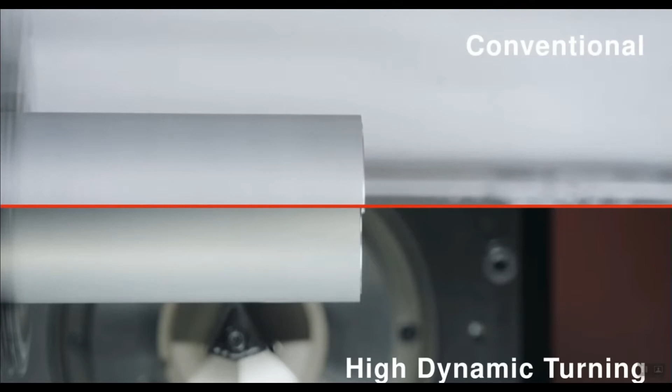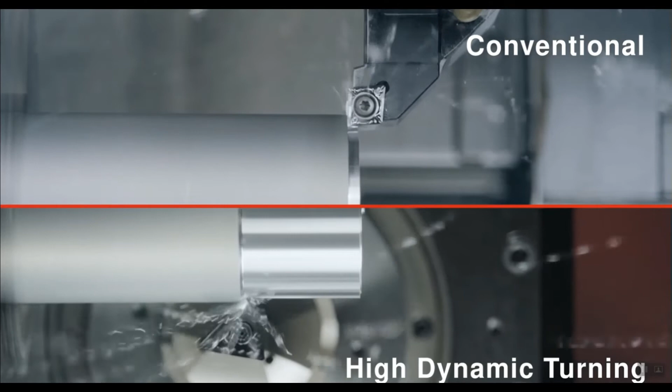At the top, we're going to be seeing the conventional turning with the traditional tools. On the bottom, we have our high dynamic turning or FreeTurn, and you can see that it's like a triangular rod, and you can actually use all three of those sides of the triangle to cut. So if you need a new tool, it just rotates your spindle, indexes to that, and now you have a new tool. So that's saving you a lot of tool change time.

In addition, you can have maybe those two short ends as your roughing tools. You can see how deep of cuts it's taking, and then once you're all finished, have it indexed to the sharper point, and that allows you to do a better finish. And you can see here also that it's going back and forth, which is really a huge advantage. And you can see through this video how much faster we're able to machine this, almost exclusively because of that functionality.

With high dynamic turning, you can also run at feed rates about 40% faster, and you can also take a lot deeper cuts. That's because we're not using these really thin tools to get into, as you can see in the top, some of these nooks and crannies. Because it indexes and because it rotates, it can get into those nooks and crannies without having a really thin insert, which allows us to take deeper cuts.

And you can see that midsection there, that was all done in one contour cut, and that's what we're going to be doing in our demonstration today as well. Kind of impressive cuts here. Again, you can see our finishing here on the bottom. And as I alluded to before, this video cut the conventional tool changes out, but they are doing tool changes, whereas the high dynamic turning is not. So it's even machining this part faster than we're seeing.

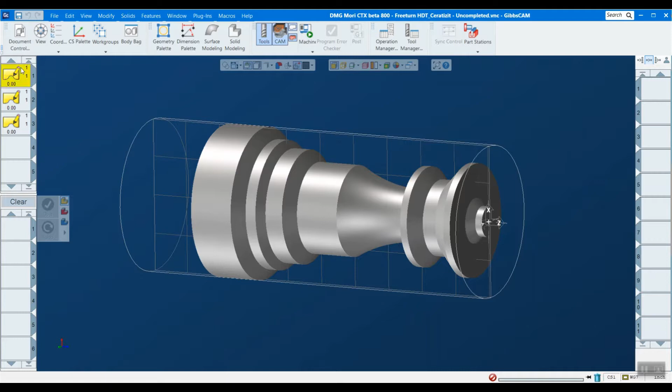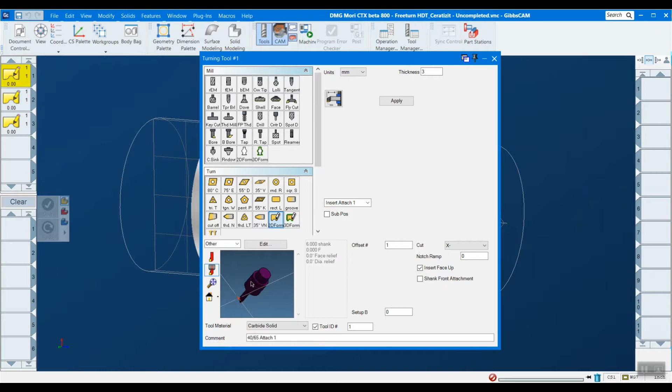So how do we do this in GibbsCAM? The first and most important thing I would say is the tooling here. Everything we're going to be using today is actually a form tool. We went out to Ceratizit's website, and we downloaded all the dimensions for all their different tool tips and that kind of thing. And then in addition, I got their tool holders. You just download a solid model of them, and you can import that into GibbsCAM and set it all up through the intermediate tooling here, right?

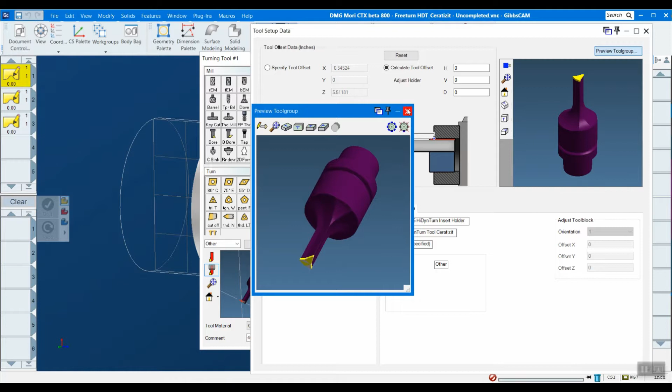And we're going to be talking about that in a different portion of the class, not in this particular video, just because it's its own separate topic. So if you'd like to know more about that, feel free to tune into that video, but I'm not going to be showing too much of that in this, okay? So that's what the tools look like in GibbsCAM. Again, they are form tools here. So let's start creating our own, okay?

So I'm going to go to a home view here, which is just the same as the top view, and I've set up some work groups here with a bunch of different stuff on them. But what I really want here is, again, those DXF dimensions that I got from Ceratizit's website. So this is what the tool looks like.

And if you're familiar with 2D form tools, you know that the tip that's touching the origin is going to be the one that we're using. So this is going to be kind of that finishing tool that we talked about in our orientation here, right? So all I have to do is double click this to select, and let's create a new tool. We want it to be a 2D form tool. I'm going to hit apply here, and you see we have our tool pop up here.

I have a thickness of 3. Now, one thing I didn't point out is Ceratizit does all their tooling, as far as I could find, their free turn tooling in metric. Okay, so that's why I have millimeters here. So this is a 3 millimeter thick tool as of right now. It doesn't matter too much because we're going to be adding that holder on, like I said before, but just keep in mind that it is millimeters and this is an inch part, and so GibbsCam does all that kind of translation stuff behind the scenes, and you don't really have to worry about it, okay?

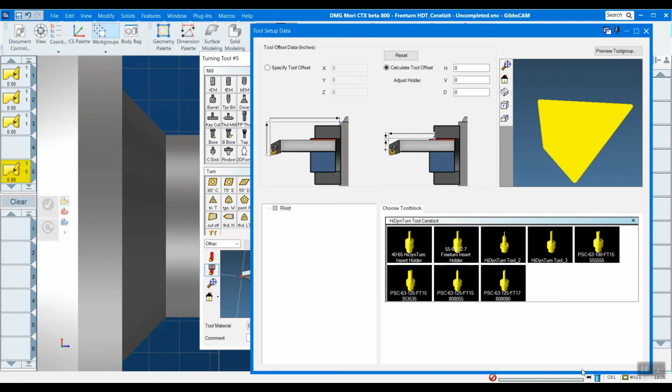So let's add our tooling now. I'm going to use the 55 degree, 80 degree, so these fat sides here are 55 degree tools, whereas this is an 80 degree, kind of more for finishing, in my opinion, but you can use it however you like. So all I have to do is select that one, and it kind of populates it in.

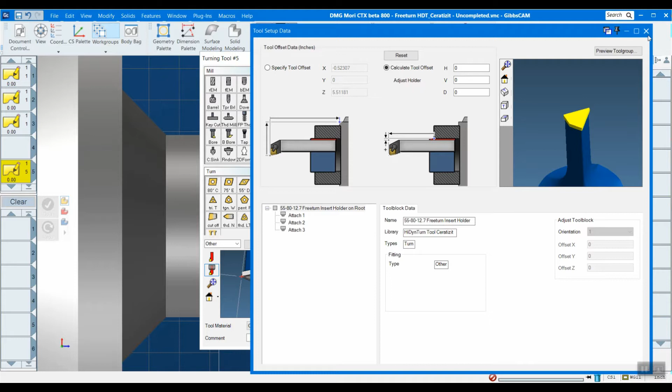And you can see here from this little tree in the bottom left-hand corner that there are 3 attachment points. And what that is denoting is we are actually going to be having 3 tools on this one tool holder, right, on this insert holder. So all I have to do is click that, and then I can go close it. And over here in our preview down here, you should see that it looks pretty good to me. Yeah, looks good to me.

One thing that's kind of nice to do, and that I recommend doing, is checking this little box down here that says tool ID number and putting in a tool, because even though they're separate tools in GibbsCam, we're going to be having a tool 5, 6, and 7. It's all technically kind of the same tool, right? So how does that happen? Well, we're going to have a tool 5 here, but then we want this tool ID to be 5 for all 3 of these, so that the programmer or whoever else is setting up the machine knows, hey, there's actually not 5, 6, and 7 tools, there's just a 5.

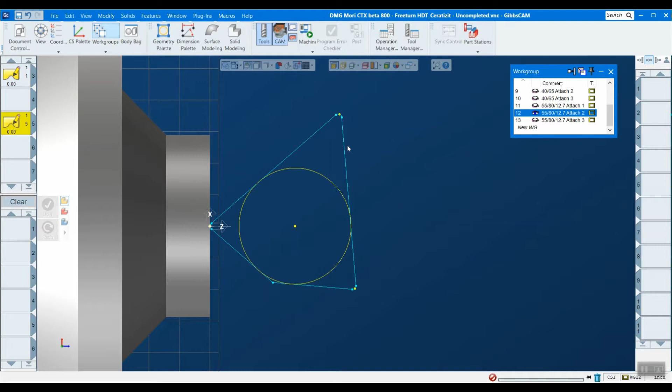All right, so we've got to continue the same strategy for the other corners of the tool. Now, all I did here is I took this and I created a new work group, and then I rotated it and translated it so that the corner that I want is touching the origin. That's just kind of basic form tool stuff. So I'm going to double click that, and we're going to do the exact same thing, 2D form tool. We're going to hit apply, and you see that the point that it's calculating with is on this corner now.

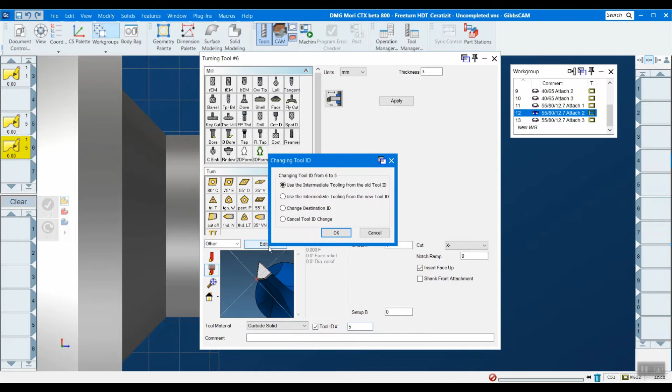We're going to add that same insert, and you can see that this kind of looks funky, right? It's not quite aligned to how we're going to use it. So you have to select the correct attachment point. In this case, it's going to be attachment point 2. If you're unsure, just look at the graphics area and choose the attachment point that kind of aligns, right? So this is attachment point 2. And again, I want to change that tool ID number back to 5 so that people know that it is the same tool. Okay, and we got one more attachment point here.

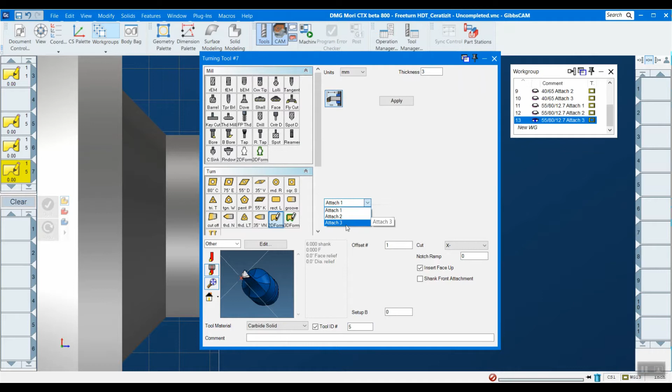All right. Once you know what you're doing, it really doesn't take long to set up at all. Okay. Cool. So that's all there is to it. I have my tools all set up here, right? And we're ready to actually start machining this bad boy.

I'm going to turn off my geometry for just a minute. I typically like to use a profiler, although you will see throughout this exercise that there are indeed cases where the profiler will not cut it, so to speak. Okay, so let's turn on our profiler here. This just grabs our outside shape, and I'm going to start by using this tool 6 here. I believe it is one of the side ones here.

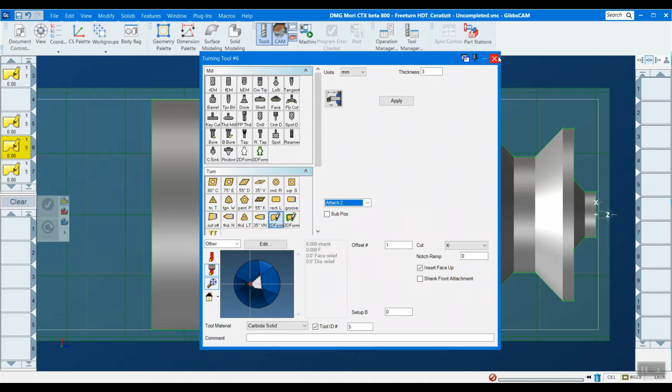Yeah, so this is going to be my roughing corner. I'm going to bring this down. If you're familiar with turning, as far as roughing operations, it's exactly the same. There's really no difference at all. GibbsCAM is intelligent, and it looks at your tooling and your holders and all that, and it knows that we're going to be doing free turn, right?

Okay, so I want to do a front face here, and I'm only going to really come off the edge like 0.1 to kind of clean up some of this facing allowance that we left on here earlier. And I'll also go ahead and leave like 0.005 stock, and that's because this is a roughing operation, right?

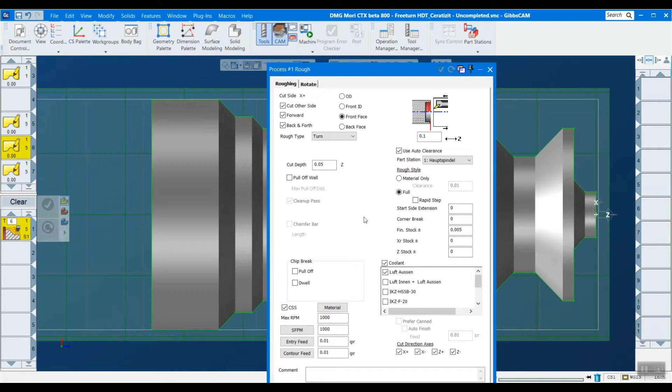I want to be cutting on the positive X side, and the reason for that is it looks nicer, and we'll be able to see it when we actually simulate it. You don't have to do that. That's just how I want to set this up. So again, really nothing else I need to dwell on here.

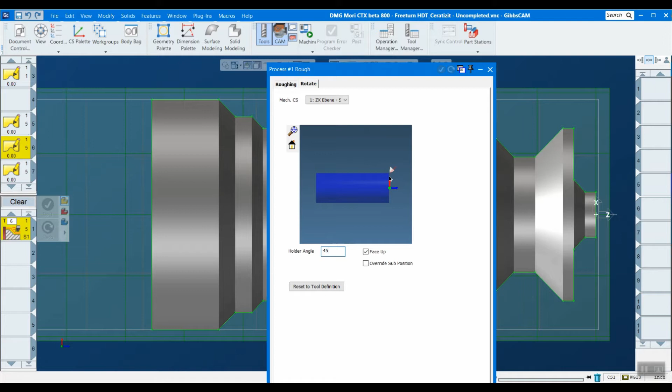Another important thing, though, is the rotate tab here. So because we have a tool that can rotate dynamically, we want to kind of angle it. And this can be an iterative process. I just know from past experience that I really want to look at like a 45-degree angle, and that's because we're cutting with this side of the tool, so I want to rotate it and have it lock in that position at 45 degrees, okay? But that's the only new thing.

The rest is history. I'm going to do a little more than a facing operation here, but I'm still just taking out the front face here. Okay, I'm going to hit do it, and you notice when I hit do it that the toolpath appeared and then it flipped down to the ZX plane, right? And that's because, again, it knows that our spindle's coming down here.

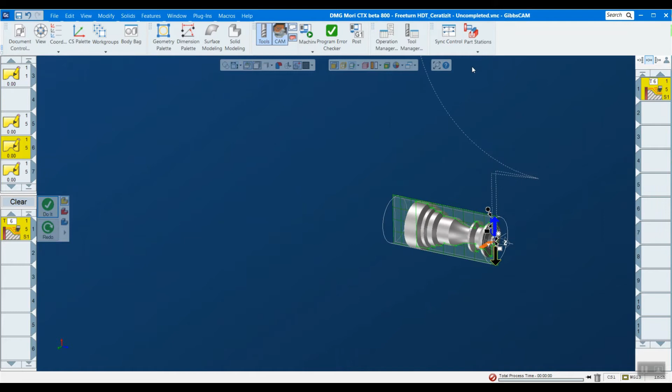My approach is a little messed up, but I'm not going to dwell on that. That's not what we're here to learn. You guys know how to fix that. It knew to automatically flip it to this plane because of our tool orientation.

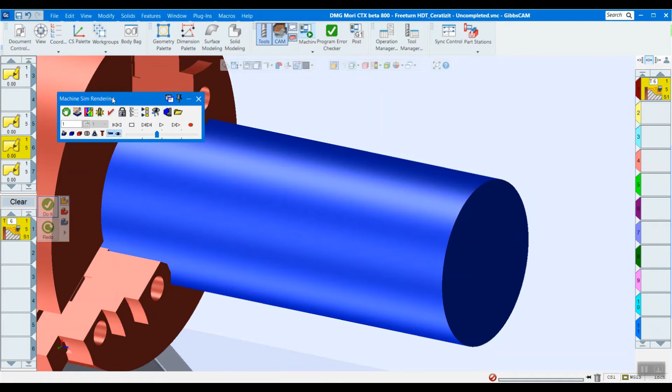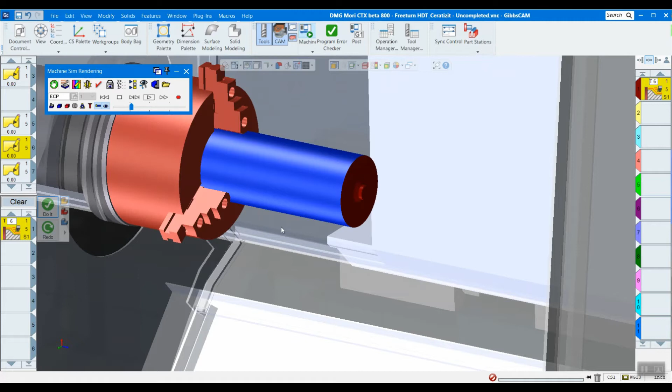Okay, so if I jump into my machine sim here, I have a DMG Mori CTX Beta 800 loaded up. And let's kind of slow this down and show you how it works here. So again, we locked the spindle in this operation. We're not rotating at all. This is not necessarily where the magic happens. So I won't dwell on that too much. We're ready for our next operation.

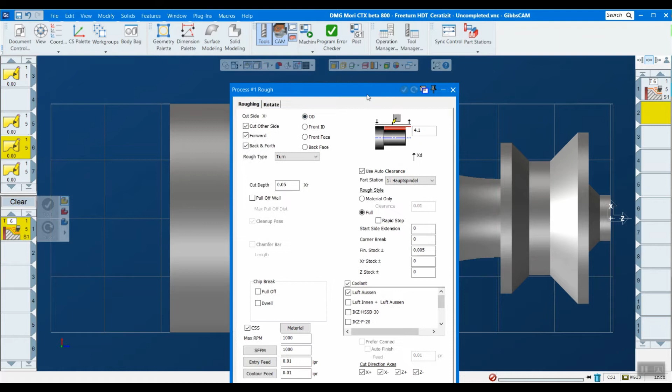I'm going to turn off my profiler. We won't be needing it. I extracted some geometry and manipulated it a little bit to kind of get what I wanted for these subsequent operations. Okay, so now let's do the same thing. I want to use the same tool, and again, I'm going to be doing a roughing operation. Now this time it's actually on the OD, right? I'm not doing the front anymore.

And I want to make sure that I'm cutting the positive X side just so that we can see it when I simulate it. You can do whatever you want when you're actually machining this. Again, I'm going to leave 5 thousandths finished stock just so we have something to take off in a later operation. But that's it. That's really all there is to it.

Now, I played with this one, and I know that an 85 degree is a good angle, and you can see that dynamically update when I populate this box here, right?

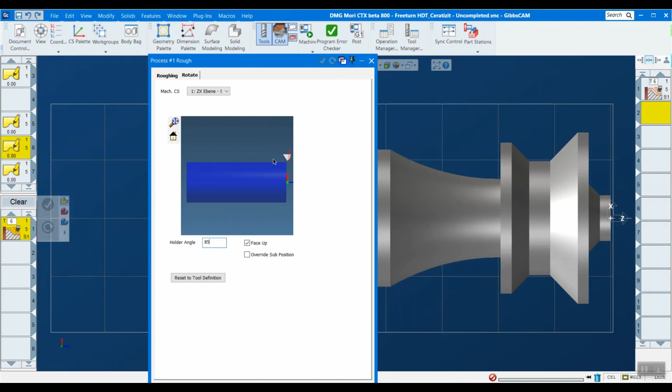And so in this one, the reason that I extracted geometry and made my own geometry is I don't want to cut this part just yet. So I just kind of want to rough all this out in a somewhat traditional manner, and I don't want to bother trying to get in here. So that's that.

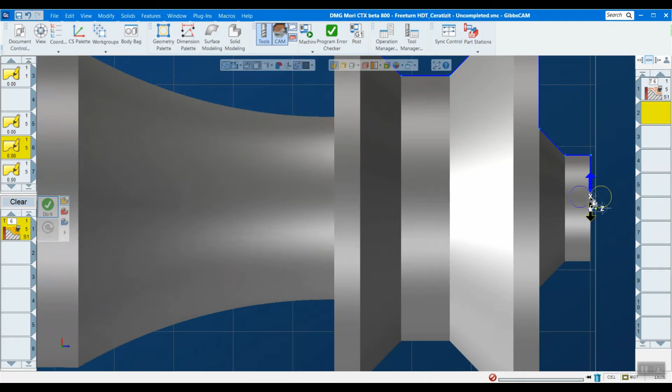I'm also not going to try and cut back here because that's where we're grabbing, right? So I want to end right here, I think is probably pretty good. Make sure that we're starting past our 0. Although we did finish or face that already, so it's not too big of a deal.

We want to make sure that we select the correct circle so that we know what side of the line we're cutting on. You have to do that whenever there's geometry. The profiler last time was intelligent and it can tell which side the solid is, but geometry is a little different. So that's all there is to that. Again, we see the toolpath kind of generate up here and flip right down.

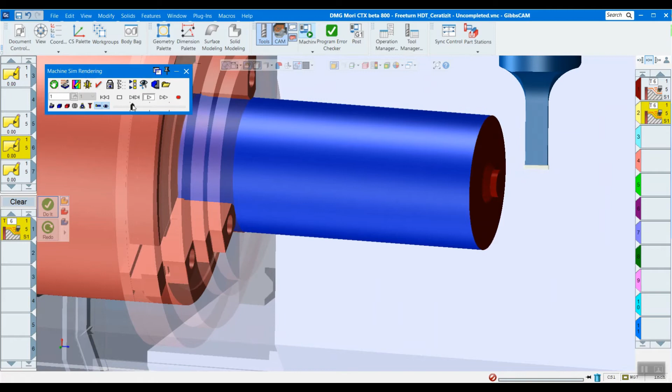Let's go back into our machine sim. I'm going to play this relatively slow. We'll watch the first operation again. You can see it rotated a little bit there. And now, one thing I forgot to point out is you see how it's going back and forth.

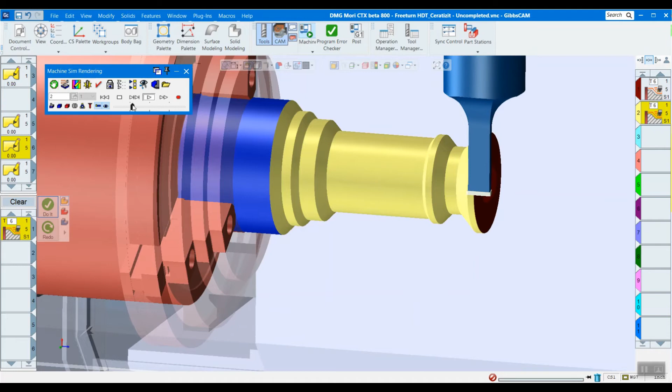So it's simultaneously forward turning and back turning, making this roughing operation go up to 2 times faster than if we were just going forward and we had to come back to the front and go forward again. So we're really speeding up this operation. I know it's hard to tell from the simulation, but that's that. Okay. All right. So that's the roughing out of the way. The roughing is pretty easy.

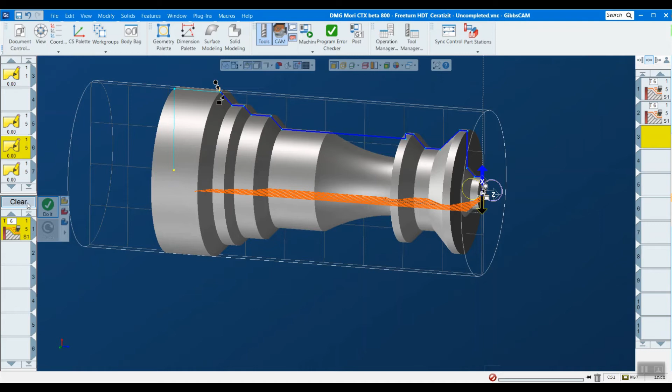There's a little bit more to the contour, and the reason for that is because so far in these operations that we've done, we just locked the spindle in a specific orientation and then just roughed the whole thing out. But now, when we're contouring, I really want to hug the whole part as we go deep, right? As we get into this kind of corner down here, this area down here.

So it's going to be dynamically rotating, and because of that we have to do a little bit more geometry setup here, okay? So this is something I set up beforehand. Again, this was just all extracted, and then I deleted a bunch of stuff I didn't need. I made lines here, so if you're unfamiliar, real quick, I just did a point angle, and I selected one of these points, and when you do that it fills this box in, and then you just tell it, hey, I want the line to be at this angle, right? So this is a 135-degree angle here.

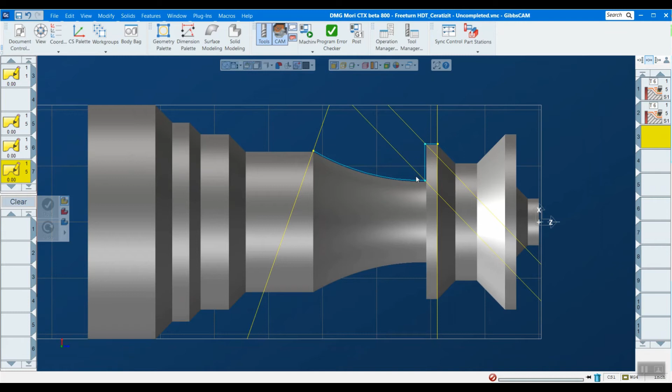And that's how we got these kind of lines, and these lines are what we're going to use to angle our thing, okay? So I'm going to be using tool 7 here, just because it can get deep. We don't want to use the tip just yet, because we're going to be doing this in a contour, so I'm not going to be taking multiple passes. I'm just going to do it all in one fell swoop.

Okay, so contour, OD, I'm going to adjust my clearance plane here. 0 stock. We're going to do another operation, but this is going to be somewhat of a finishing operation, so I'm not going to bother with all that. Just double checking everything here. I think it looks good. Now, here's the new thing. So this is what we're used to seeing when we were doing the roughing operation, right?

However, if you check this variable B, and for people who are familiar with using B-axis turning in GibbsCam, it's exactly identical. It's the same thing. GibbsCam just kind of posts it a little bit different based upon how your tools are set up and that kind of thing. So I want to select vectors, and these are going to be our tool angle vectors, and you also want to have this here say insert vectors. That's just how you do this, and we're going to be selecting multiple features because I have multiple lines here that I want it to be rotating our tool the whole time that it's doing this.

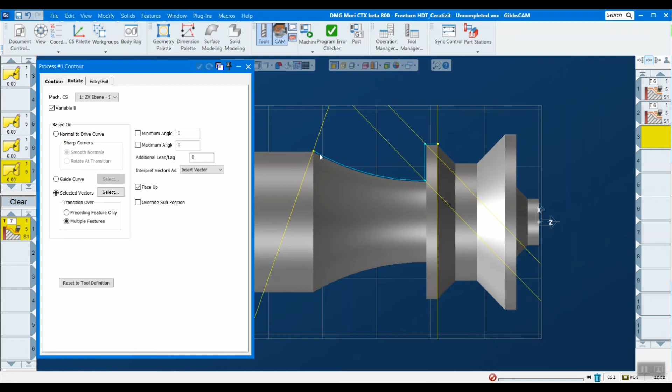Okay, so first thing you want to do, and this is a little bit different from some GibbsCam stuff, I want to select the geometry first before I select my vectors. And the reason for that is if I select my vectors first, it kind of interprets my selecting the vectors as my selecting the geometry that we're cutting. So it'll actually try and use these lines to cut my part, which is definitely not what I want to do.

Okay, so now that that's selected, I'm going to hit select vectors, and I want to select them in the order that we're going to be doing this. And I'm actually doing this backwards. I'm going from left to right here. So holding the control key down, I want to click on the part of the line that's facing towards the head. Okay, so the outside of our part. Here, here, here, and here in order, right? And then just say OK.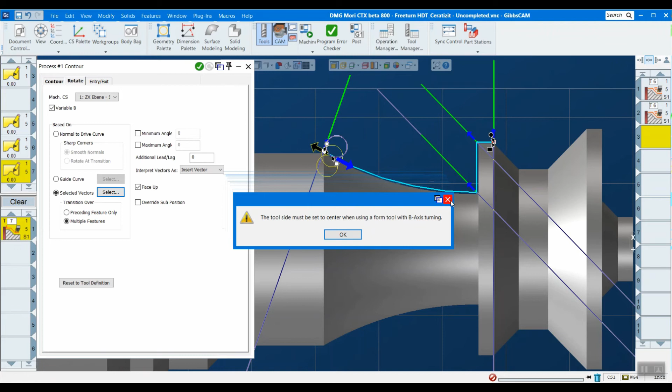All right, and one last thing that you have to do, I'll mess it up just on purpose here. It gives you a little warning here saying, hey, you have to set the tool side to center when using Form Tool with B-axis turning. Okay, that's nothing new if you're familiar with B-axis turning. So all that's saying is it wants me to select this little circle here in the middle. But I do that, and that's that. And so you can see that it made our operation and flipped it down to this plane.

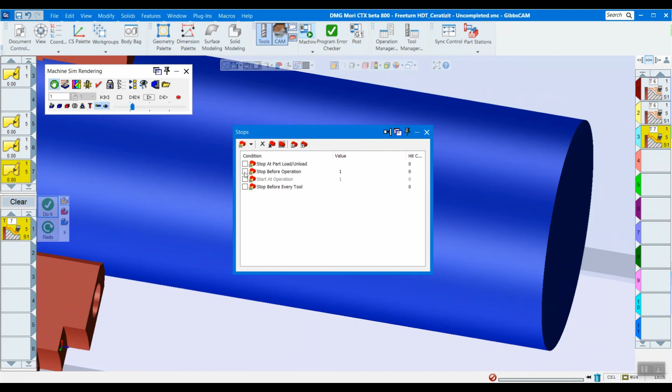Okay, now I'm going to go into my machine sim and I'm going to set up a stop before operation 3. Just so we know those first two operations are good, let's not dwell on it. Okay, so this is where we left off last time, and now I'm going to slow it down. And you can see it kind of rotate right into that corner. One big deep cut. Super quick, very nice. That's exactly what I wanted.

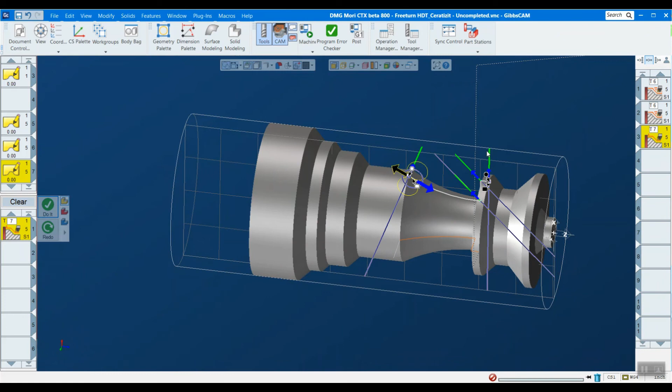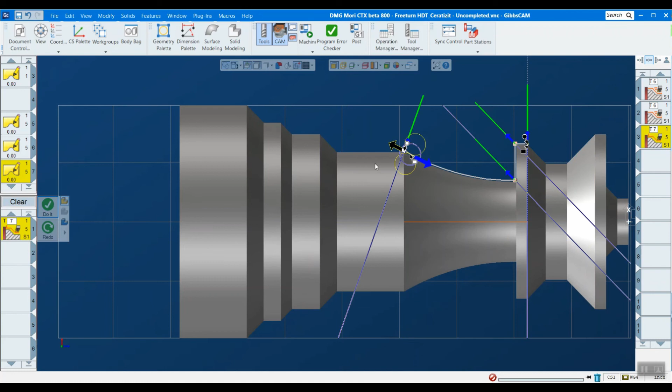All right, so we have one more operation here, and that's just going to be a finishing operation. Let me turn off my second spindle. We actually don't use it for this part. Okay. And so same kind of thing that we just did. There's a couple more lines, but the concept is identical, right? And if I wanted to, I could actually maybe steal this old operation, but let's make a new one. I suppose it doesn't hurt to reiterate things, right?

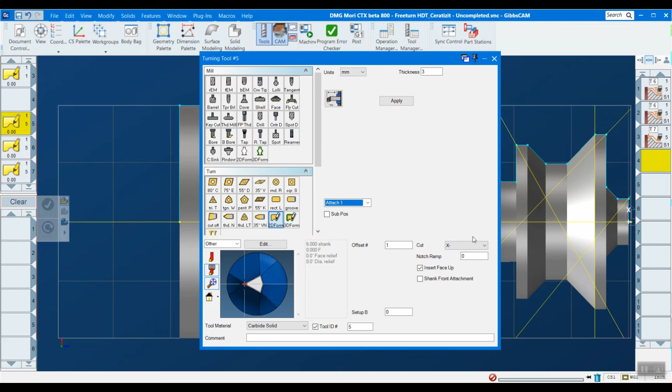So, back to my work group here. For this last one, I want to be using my tip, so the very front part of our tool, because it can get in kind of narrower places down here and all that good stuff. So that's what I'm going to be doing for this last operation. Again, it's a contour. OD. We want to be cutting the positive side, not leaving any stock, but everything else is exactly the same, right? Okay, so going to our rotate tab, we have our variable B. Remember that we select our geometry first.

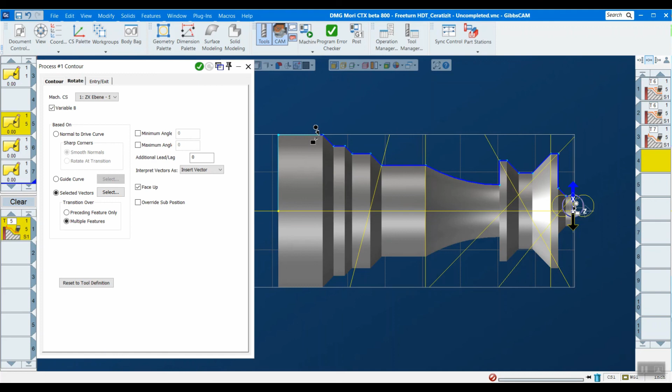I will be starting off here. I'm going to go forward this time. We need to select the center circle. And I don't want to go this far back, right? I'm going to actually go to this line, but I'll stop before we hit our chuck, right? That'd probably be a good thing. Okay. That's probably fine. We got our center circle. All right, I think we're ready to do our vectors now.

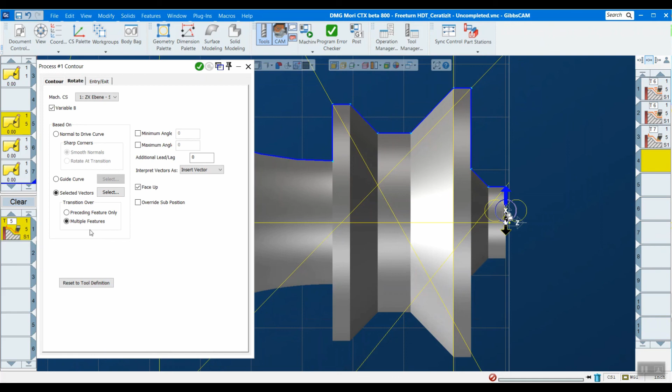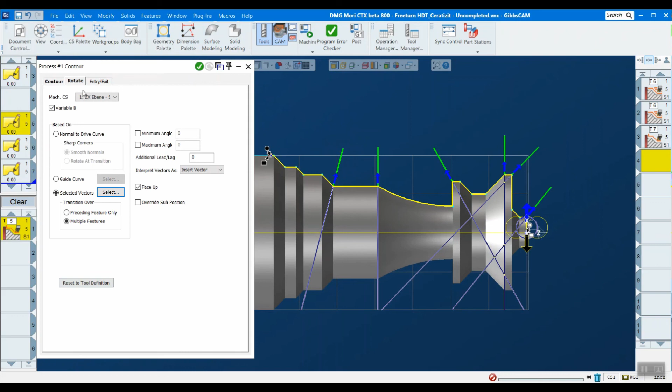Got to be a little bit careful here, just because when I'm zooming in and out, you don't want to accidentally select our geometry, because then we have to do this again. So I'm going to be very careful when doing this. Sometimes I do screw this up, so just bear with me, but I want to select the outside line. There we go. And then this guy, this one, this one, this one, this one, and that's it. That should do it. Okay, so press that, and let's just check our toolpath. It looks pretty good, but we don't know until we simulate it, right?

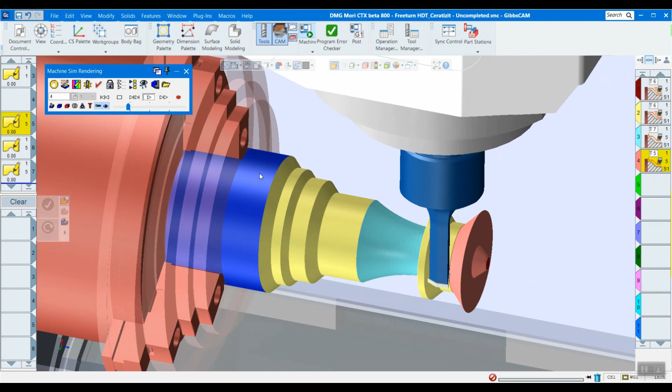Okay, so again, we have our op stop. Boop. And then I'll just go a little slow from here on in. It's going to rotate to that first position. And you can see it kind of rotate as it goes all the way through our part.

And that's it. So I did the entire part pretty quickly with 4 operations, and kind of one tool. I did have these tools up here defined, but I didn't actually use them. So that's really the power of FreeTurn, and I think it's pretty easy to pick up, especially for people who have been doing B-axis turning and even regular turning in the past.